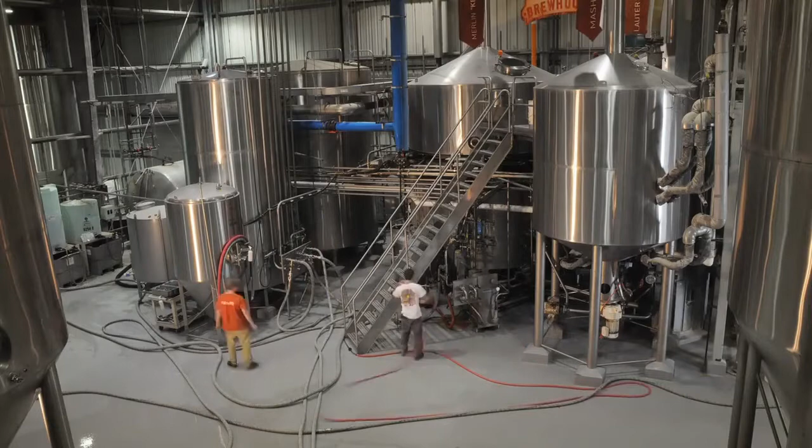Abita beer is made in the brew house, which isn't an actual building, but the name for all of the equipment used in the process of brewing. Nearby, in the brew house control room, the entire brewing process is monitored by computer and automated to ensure the quality and consistency of the product and the efficiency of the process.

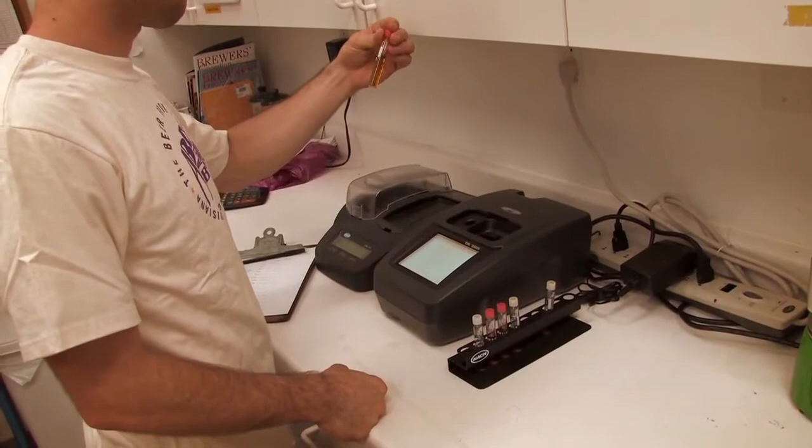The first step in making beer is combining the barley with fresh, warm spring water. This combination is called the mash, and the mixing and heating is done in a large vessel called the mash tun. The warm water activates the enzymes in the barley, and the starch in the barley is converted into sugars. Controlling the temperature of the water changes the body and sweetness of the final product.

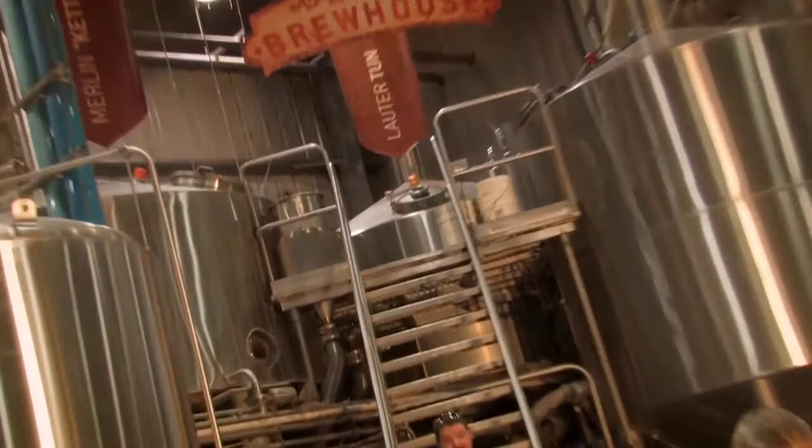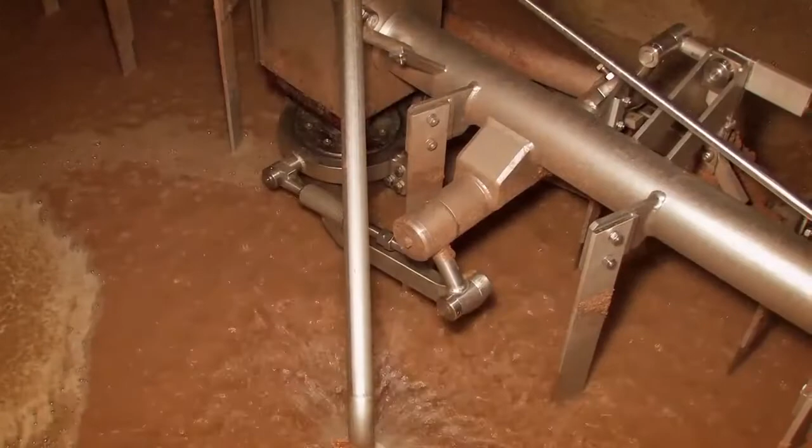The mash is then transferred to another vessel called the lauter tun. The lauter tun has a perforated steel plate on the bottom of the vessel that's like a colander or sieve. The sweet liquid component of the mash, called the wort, is extracted, and then hot water is sprayed over the grain bed in a process called sparging.

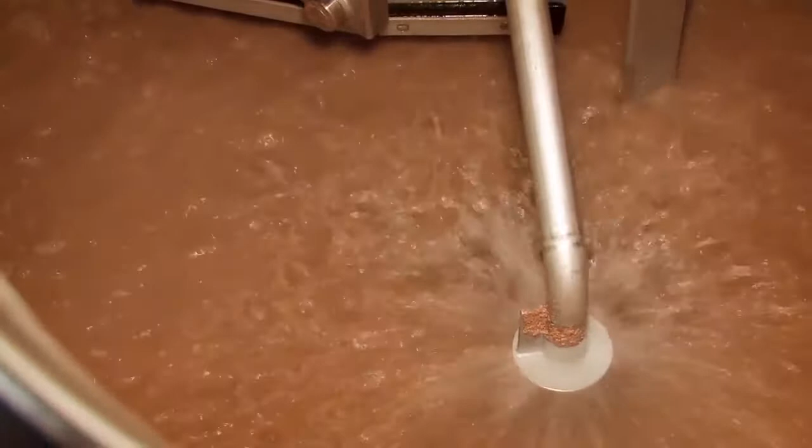All the liquid is collected at the bottom of the lauter tun and is transferred to another large vessel for boiling, called the merlin. Our revolutionary new boiling system was imported from Germany. The Abita Brewing Company was the first brewery outside of Europe to use the merlin system.

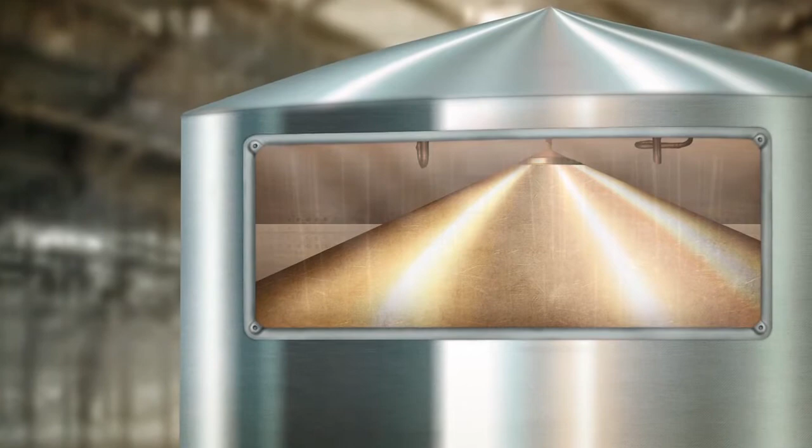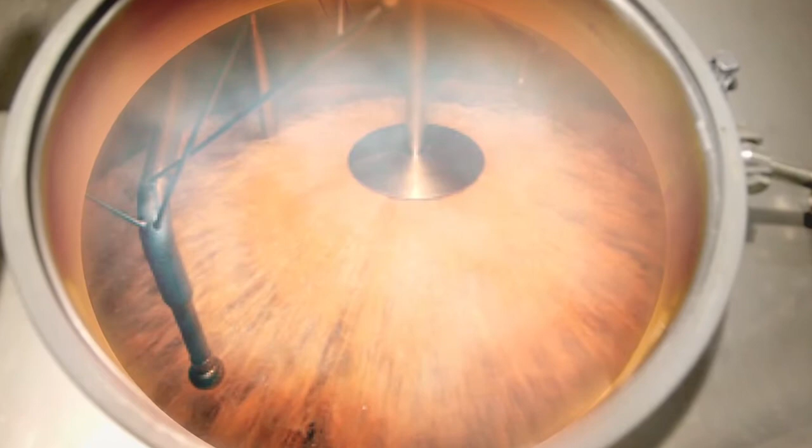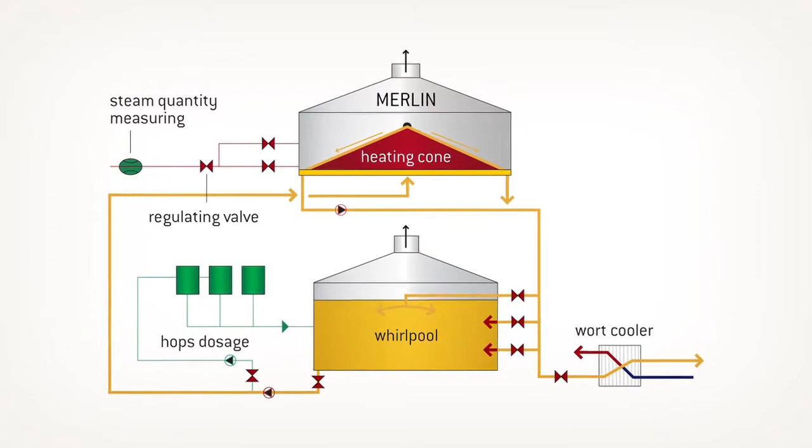Instead of applying heat to the bottom of the container, like boiling water in a pot at home, the wort is moved over a heated cone inside the merlin, which boosts the temperature of the wort and speeds up the brewing process. This heated cone is somewhat unique to the German brewing process. Its cooking method is gentler on the sugars in the beer, reduces the boiling time, and is kinder to the environment because it's 70% more energy efficient.

Hops are added to the wort at different stages of the boiling process, giving some of our beers a pronounced hop flavor. Bittering hops are added at the first stage of the boil to offset the natural sweetness of the wort. Flavoring hops are added later on in the boil to add a well-rounded hop flavor. At the end of the boiling process, more hops are added for additional aromas.

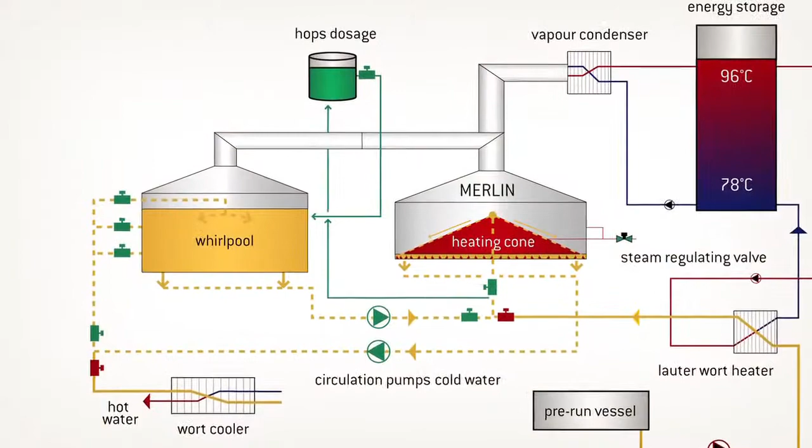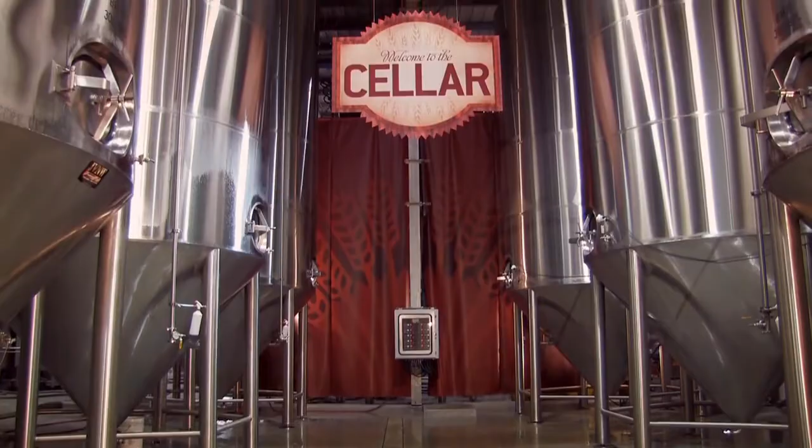When the boil is complete, the wort is run through a whirlpool process to separate the solids from the liquids. Proteins and hops are removed, and clear wort is extracted and moved into fermentation vessels. Huge special pipes and hoses are used to transfer the cooled wort across the brewhouse and into the cellar where the tanks reside. During this process, yeast is added to the cooled wort and fermentation begins.

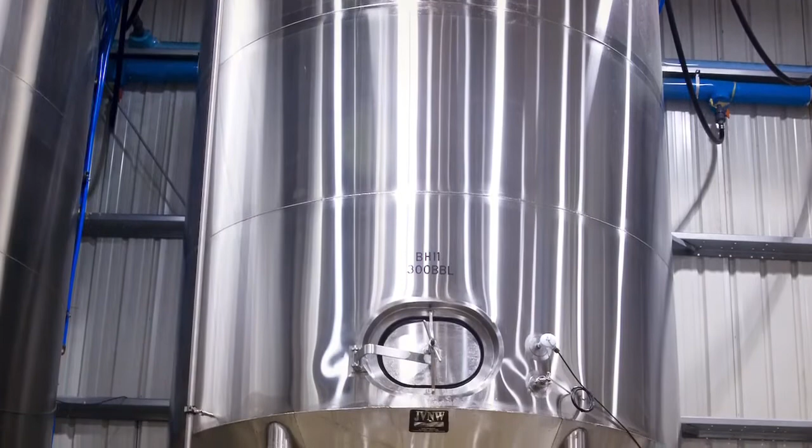There are two types of yeast used in brewing: lager yeast and ale yeast. Lagers ferment from the bottom of the vessel at colder temperatures and make a smoother, well-rounded beer. Ales ferment from the top at warmer temperatures and produce a beer with more esters. Esters are compounds that produce pleasant aromas like fruit and cloves.

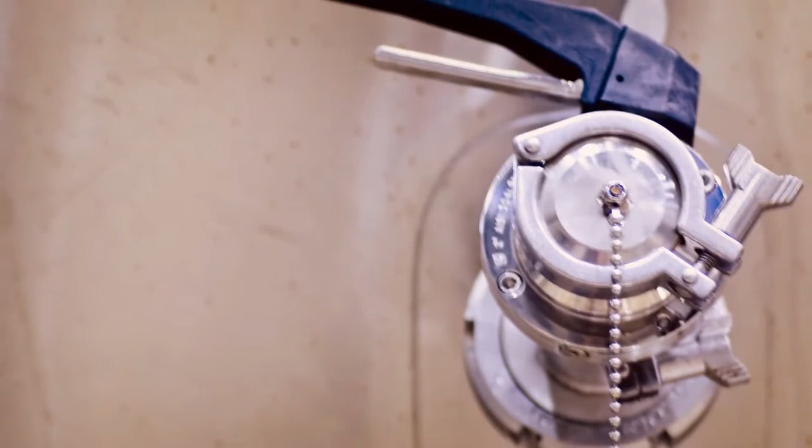During fermentation, the yeast consumes the sugars in the beer and produces alcohol and CO2. This process can take anywhere from 4 to 14 days, depending on the brew being made. When 85% of the sugars in the tank have been consumed, the tank is closed and the remaining CO2 is captured, and that's what gives the beer its natural carbonation.

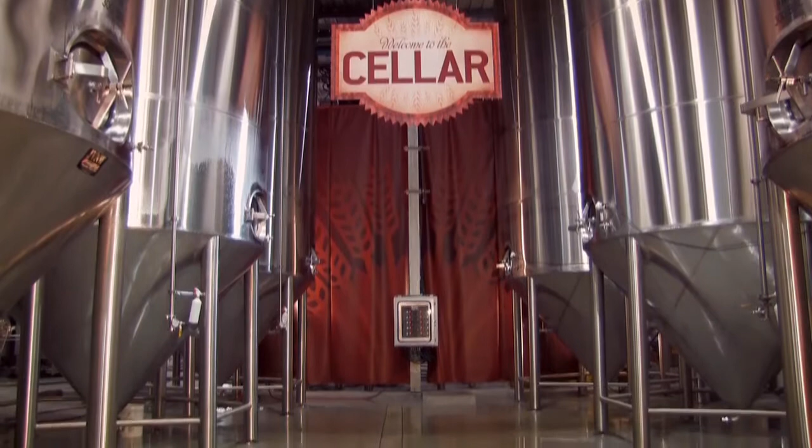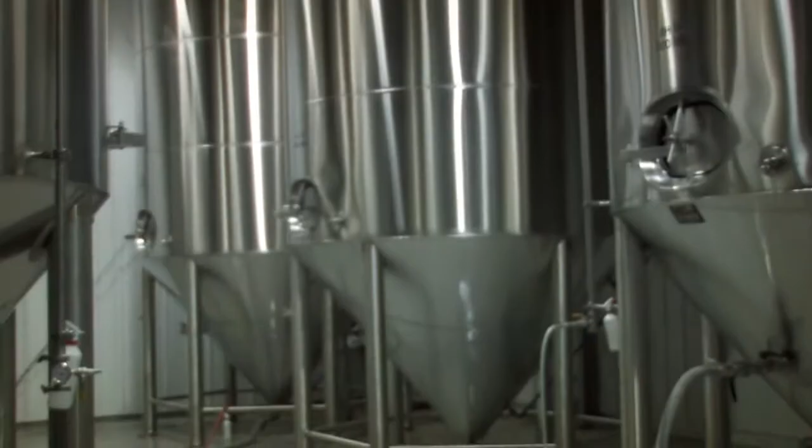The aging process of the beer begins when the temperature inside the climate-controlled tanks is dropped to around 32 degrees Fahrenheit. As the beer ages, the yeast settles and separates from the beer. The aging process for each one of Abita's brews is different, ranging from 14 days to 3 months.

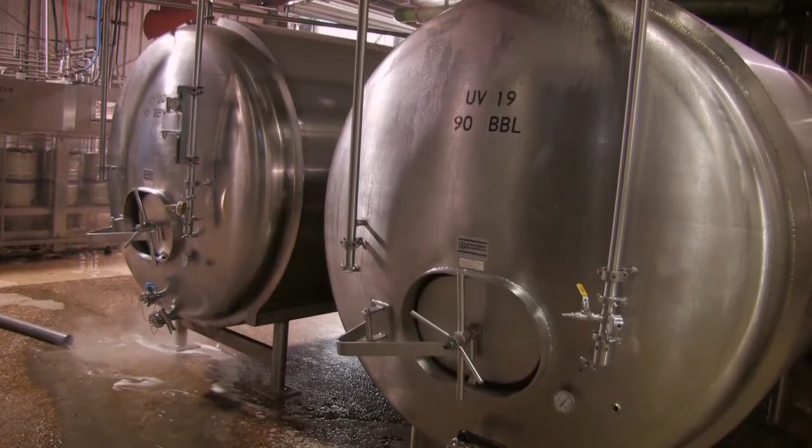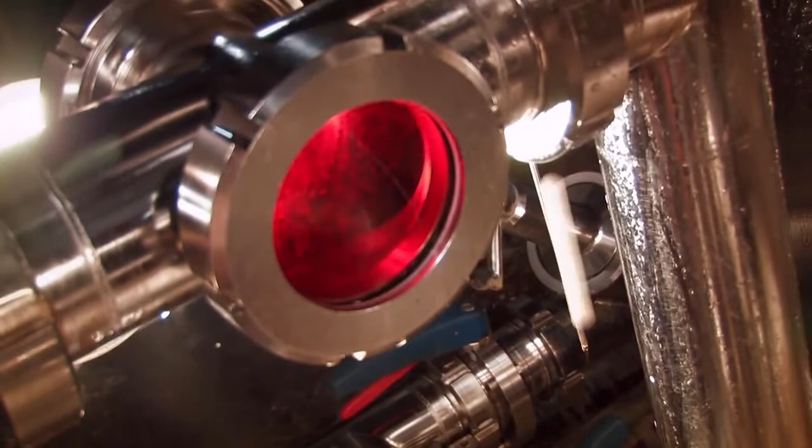Some Abita beers, like Jockamo IPA and Restoration Pale Ale, are moved to a secondary aging tank where more hops are added. This process is called dry hopping and gives the brew an intense hop flavor and aroma. After aging, the beer is ready to be filtered, which removes yeast and microproteins from the beer, and this is what gives it its brilliance.

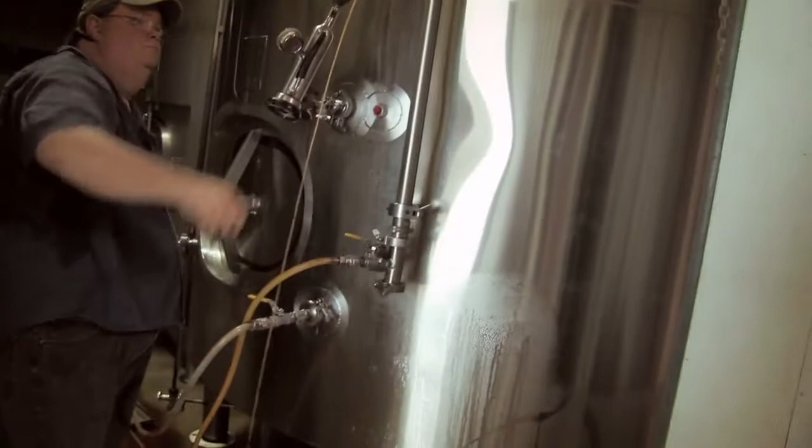When filtration is complete, the beer is moved to the bright beer holding tank in preparation for the bottles or kegs. Abita beer is bottled on our automated bottling line, capable of producing 160 bottles of Abita beer per minute.

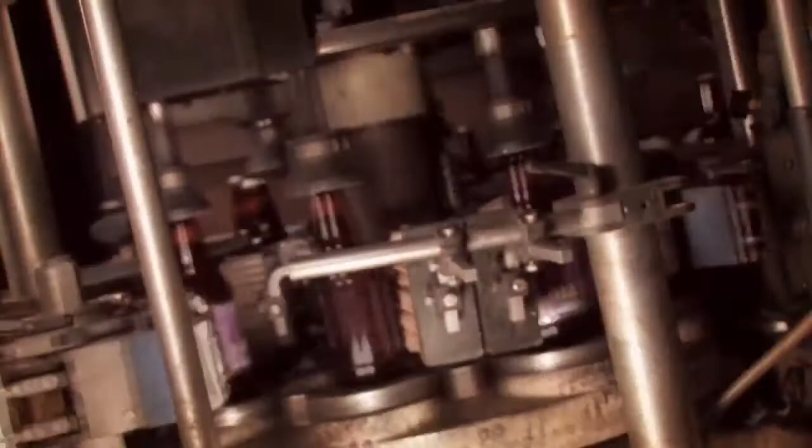New unlabeled glass bottles enter the line and are rinsed clean in preparation for filling. Air is forced out of each bottle by 2 rapid blasts of carbon dioxide to preserve the taste of the beer. Each bottle is filled, topped with a metal cap, and labeled. All Abita beer is laser dated on the bottle and 6-pack wrapped for freshness.

Kegs of Abita beer are filled by our automated keg system with exact standards for each type of keg. Every keg is cleaned, sterilized, and purged with CO2 before filling. Cases and kegs are then placed in cold storage for no more than 7 days.

And now your Abita beer is ready to roll. Shipped to our distributors for placement in stores, bars, and restaurants all over the country by our fleet of refrigerated 18-wheelers.